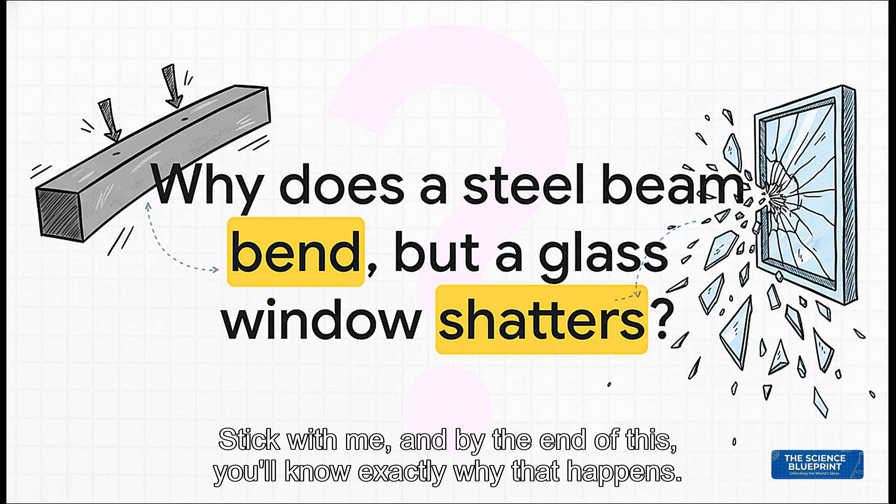Stick with me, and by the end of this, you'll know exactly why that happens. Okay, so to answer that big question, we kind of have to learn a new language. And just like any other language, we've got to start with the basics, a couple really fundamental words that explain the forces happening and how materials react to them.

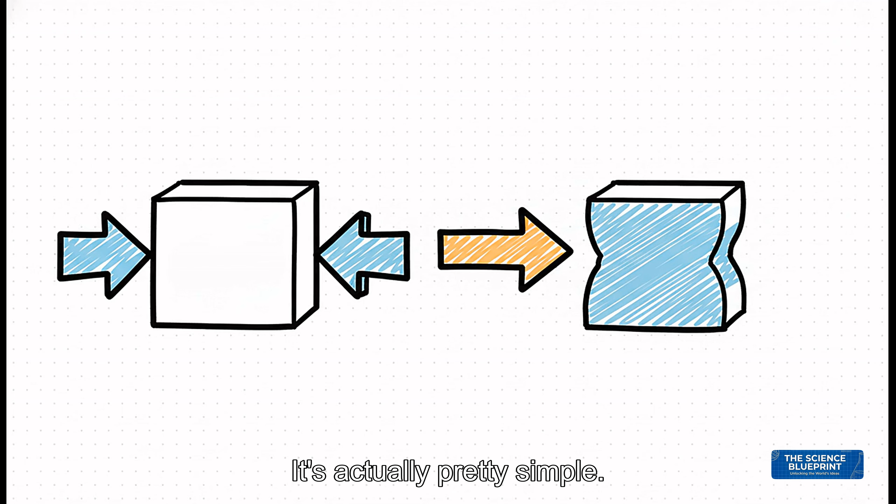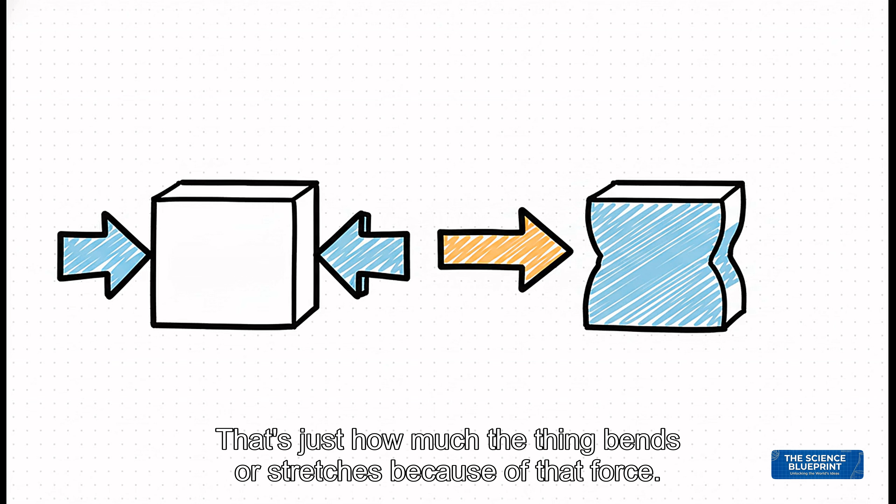The two most important words you need to know are stress and strain. It's actually pretty simple. Stress is the force you're putting on something, the push or the pull. And strain? That's just how much the thing bends or stretches because of that force. It's a basic cause and effect, and it is the key to everything else we're about to talk about.

So how can we actually see this relationship? Well, engineers have this amazing tool called the stress-strain curve. The best way to think about it is like a material's DNA. Seriously, it tells you the entire story of how that material is going to act when you put it under pressure, from the tiniest little push all the way to catastrophic failure.

Okay, so let's walk along this curve. At the very beginning, when we apply just a little bit of stress, the material deforms just a little bit. For a while, this relationship is a perfect, predictable, straight line. Engineers absolutely love this zone because it's where the math is easy and it just works. You double the stress, you get exactly double the strain. It's what allows them to make really precise and, more importantly, safe calculations.

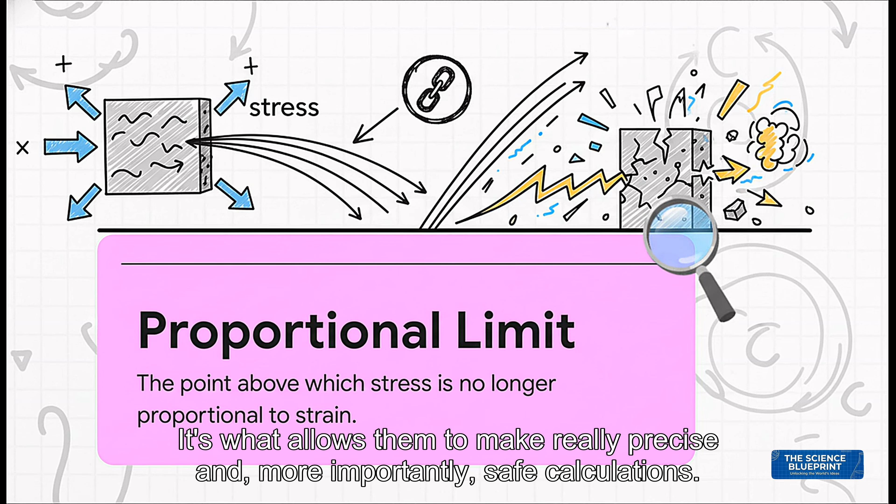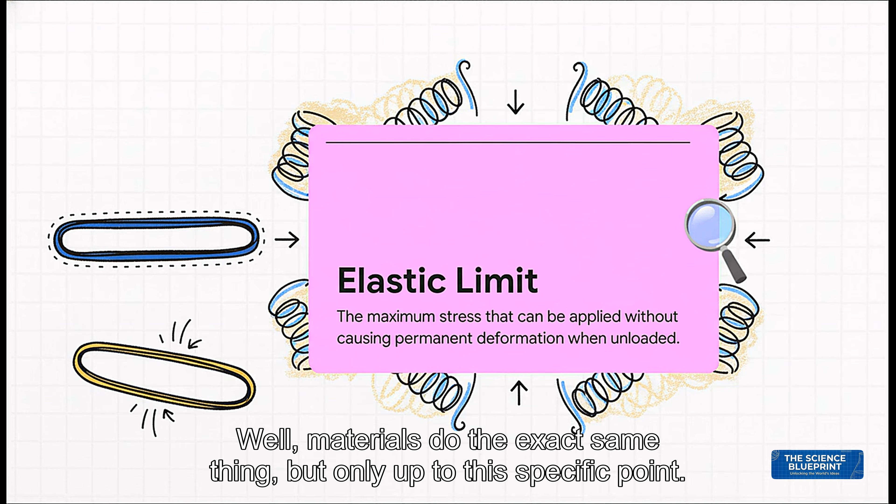Right after that straight line, we hit something called the elastic limit. I like to call this the rubber band point. You know how you can stretch a rubber band, let it go, and it snaps right back to its original shape? Well, materials do the exact same thing, but only up to this specific point. And this property is absolutely crucial for things like, say, a bridge that has to flex a little when cars drive over it, and then pop right back into place.

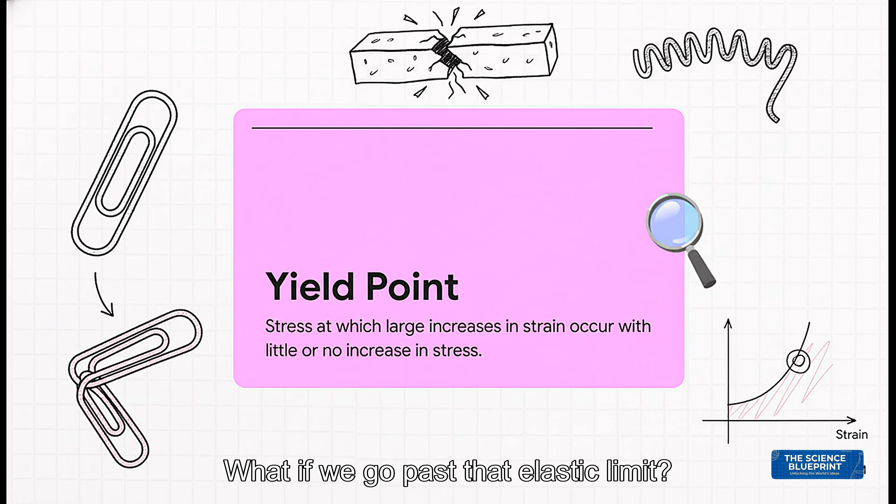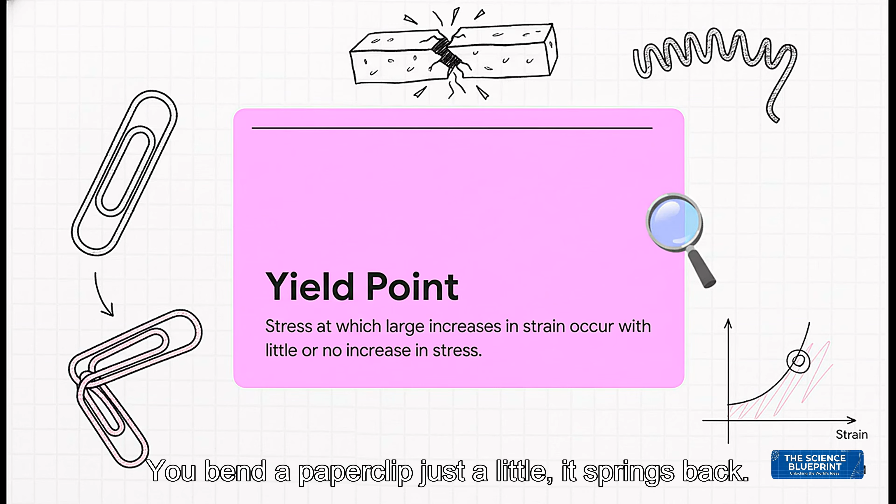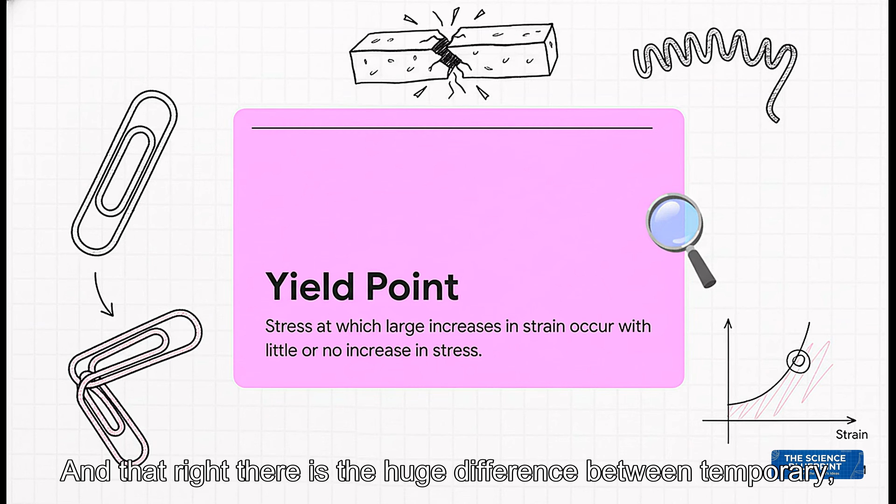But what happens if we keep pushing? What if we go past that elastic limit? That's when we hit the yield point, and this is the point of no return. Think of it as the bent paperclip point. You bend a paperclip just a little, it springs back. But you bend it too far, it stays bent forever. It has been permanently deformed. And that right there is the huge difference between temporary, elastic deformation and permanent, so-called plastic deformation.

So we keep pulling on it, and the material fights back. It resists more and more, until it hits its absolute maximum capacity. That peak right at the top of the curve, that's its ultimate strength. For an engineer, this number is everything. They design buildings and bridges so that the normal, everyday stresses are way, way below this point. They build in what's called a factor of safety to make sure disaster doesn't strike.

And after that peak, well, it's all downhill from there. The material just can't handle the stress anymore. It starts to weaken and weaken until finally it hits the breaking point. That's it, the end of the line. Complete fracture. The material just snaps.

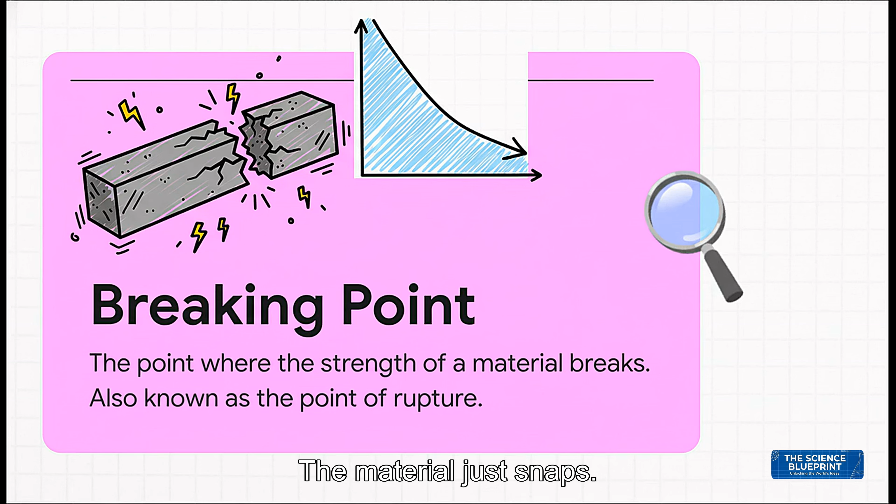So there you have it. That whole journey we just took along the stress-strain curve, it gives us the exact language we need to classify materials into two, let's call them personalities. And believe it or not, this is how we're going to finally answer that big question we started with.

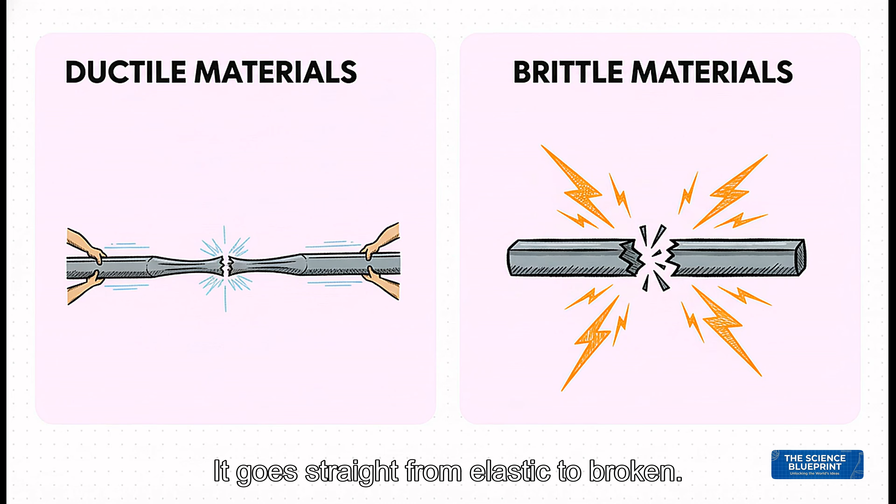And here it is, the big reveal. This is the answer. A ductile material, like our steel beam, has a really long journey from its yield point to its breaking point. See how it stretches and deforms? It gives you tons of warning that something's wrong. But a brittle material, like our glass window, it has almost zero plastic deformation. It goes straight from elastic to broken in an instant, no warning at all, just poof, a sudden snap.

But a material's built-in properties aren't the whole story, not by a long shot. To really understand them, we have to look at how they change over time, because the environment can attack them. And the most common, everyday example of this is corrosion, which you probably just call rust.

To put it simply, corrosion is really just a material trying to get back to its natural state. You see, most metals aren't just lying around in their pure form out in nature. They're found as ores, mixed up with other stuff like oxygen. So corrosion is basically just the metal trying to return to that more stable original form.

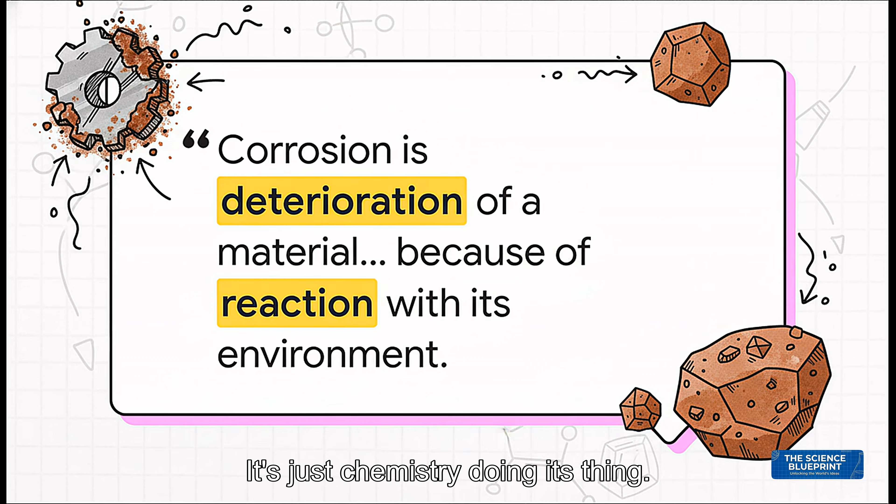It's just chemistry doing its thing. So what is the chemistry of rust? Well, it's basically a tiny electrochemical reaction happening right on the surface. In the simplest terms, when you have iron atoms and you expose them to both oxygen and water, they start to react. And that reaction creates a totally new substance, that flaky, reddish-brown stuff we all know as rust.

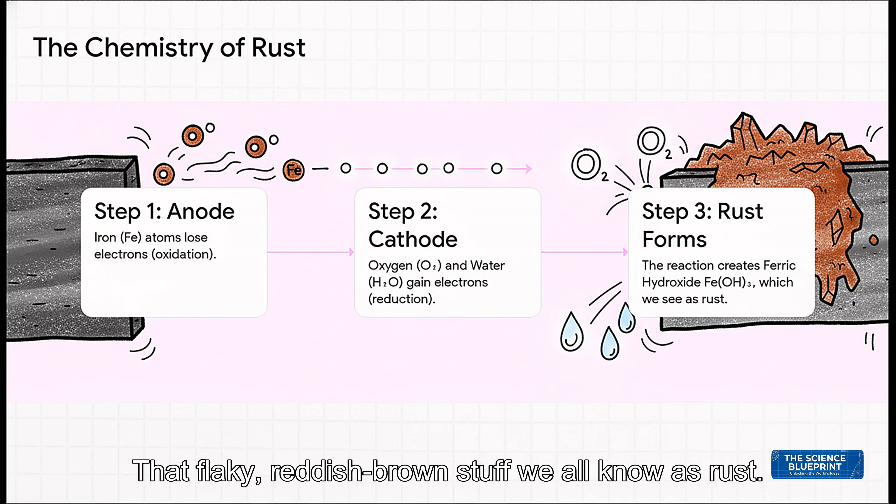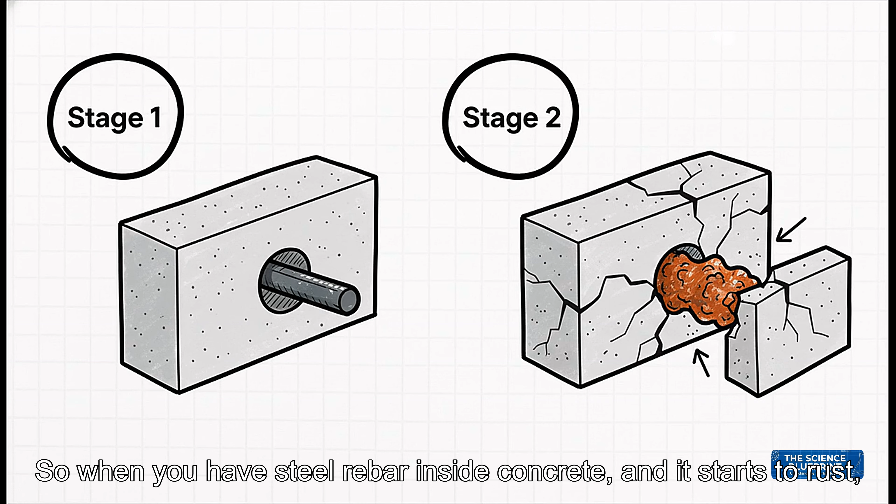Okay, so here's the really important part. Why is a little bit of rust so incredibly damaging? It's because rust actually takes up more space than the original iron did. So when you have steel rebar inside concrete and it starts to rust, that expanding volume creates this immense pressure and it literally pushes the concrete apart from the inside out. This is called spalling, and it's a huge cause of structural failure.

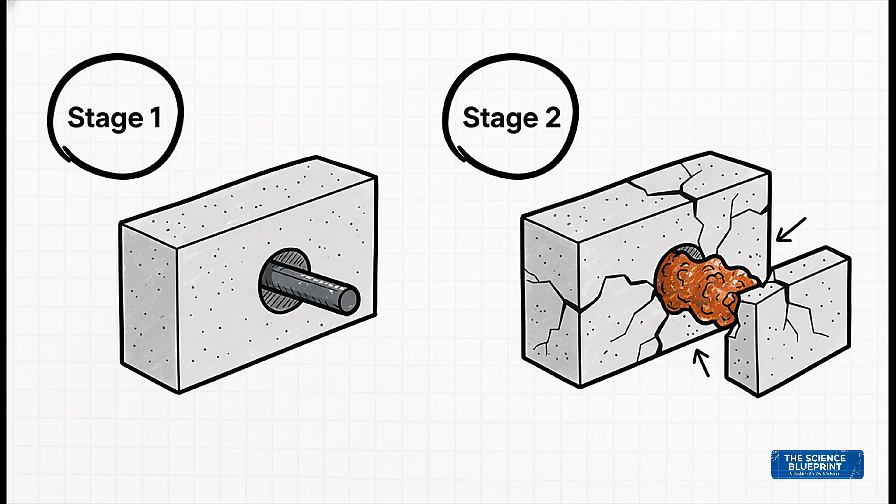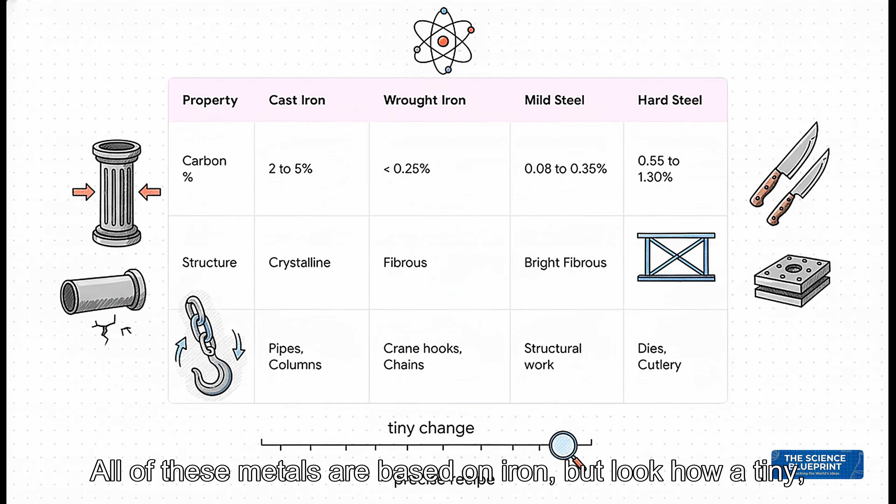All right, so now that we've got the science down, let's check out how engineers actually use all this knowledge to pick and choose and even combine different materials to build the world all around us. Just take a look at this. All of these metals are based on iron, but look how a tiny change in the amount of carbon completely changes their properties. A lot of carbon gives you cast iron.

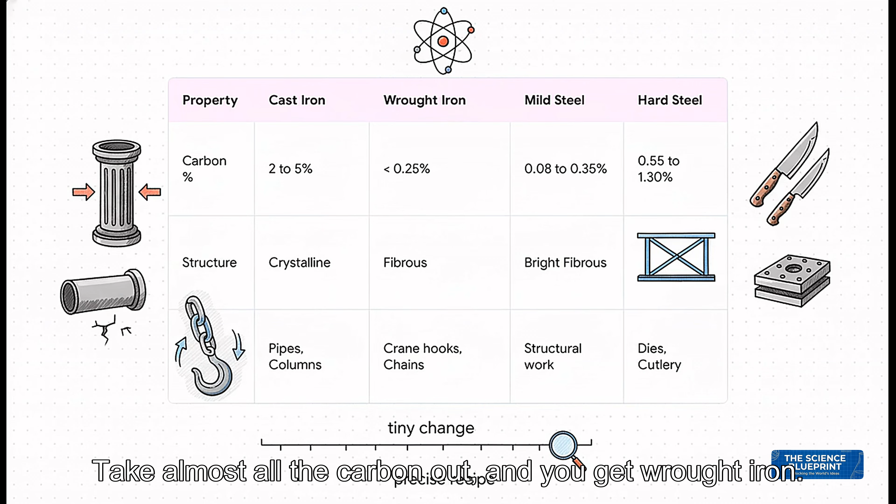It's hard and brittle, but amazing under compression, so it's perfect for things like pipes. Take almost all the carbon out, and you get wrought iron. It's tough and ductile, ideal for something like a crane hook that has to bend without snapping. It really is all about finding the perfect recipe for the job.

Then you've got plastics, which are a whole other universe of materials. I mean, their advantages are just huge. They're super lightweight, they're great insulators for both heat and electricity, and you can mold them into pretty much any shape you can dream up. Just think about their weight. That one property has totally revolutionized everything from cars and planes, making them way more fuel efficient, to simple packaging, which makes things a lot cheaper to ship.

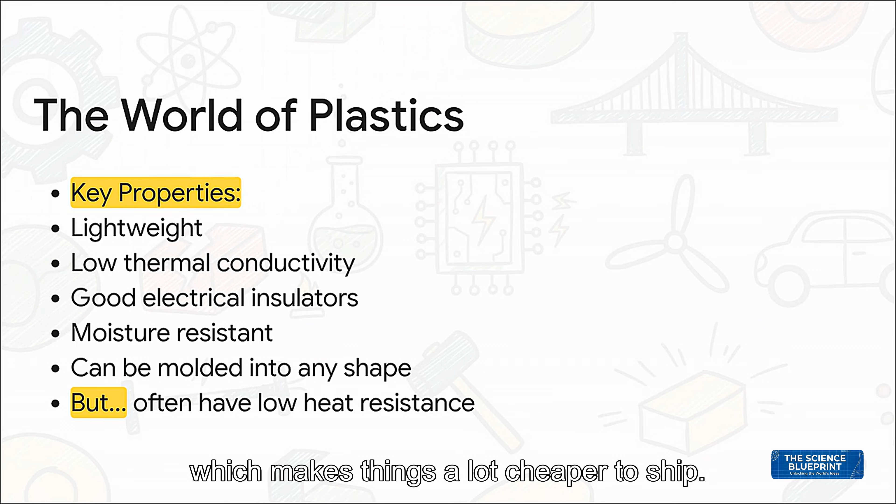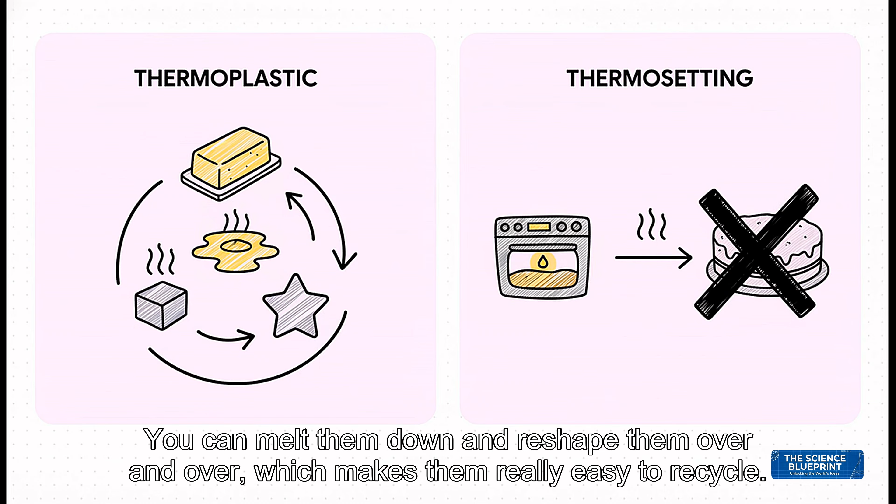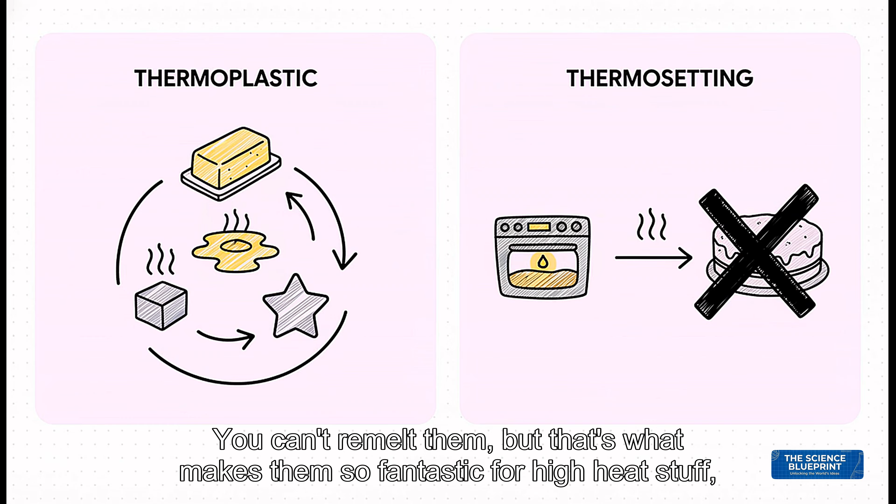And just like metals, plastics have their own personalities. You've got thermoplastics, which are kind of like butter. You can melt them down and reshape them over and over, which makes them really easy to recycle. Then you have thermosetting plastics. These are more like cake batter. Once you bake them, that's it. They're set permanently. You can't remelt them, but that's what makes them so fantastic for high heat stuff, like the casing on your electrical plugs.

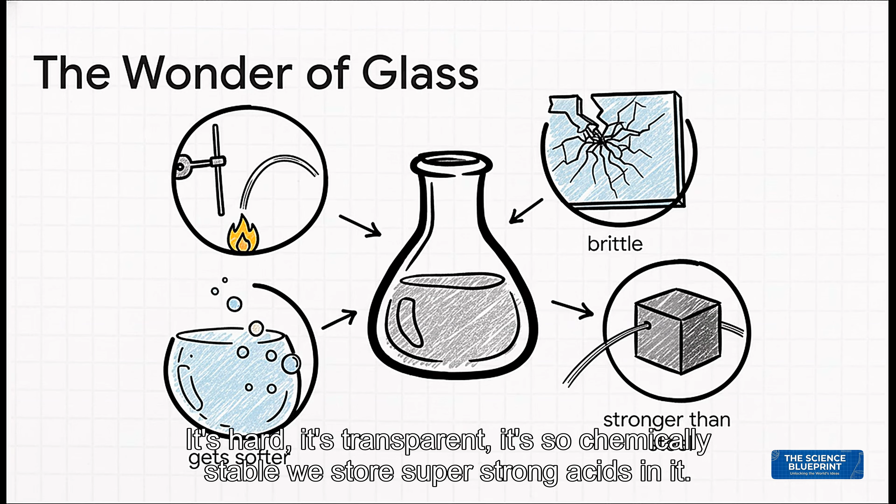And that brings us full circle right back to glass. What a weird material. It's a total bundle of contradictions. It's incredibly brittle when it's a window pane, right? But a super thin fiber of that same glass can be stronger than steel and carry all of our internet data across the entire ocean. It's hard, it's transparent, it's so chemically stable we store super strong acids in it. Just a truly unique and versatile material.

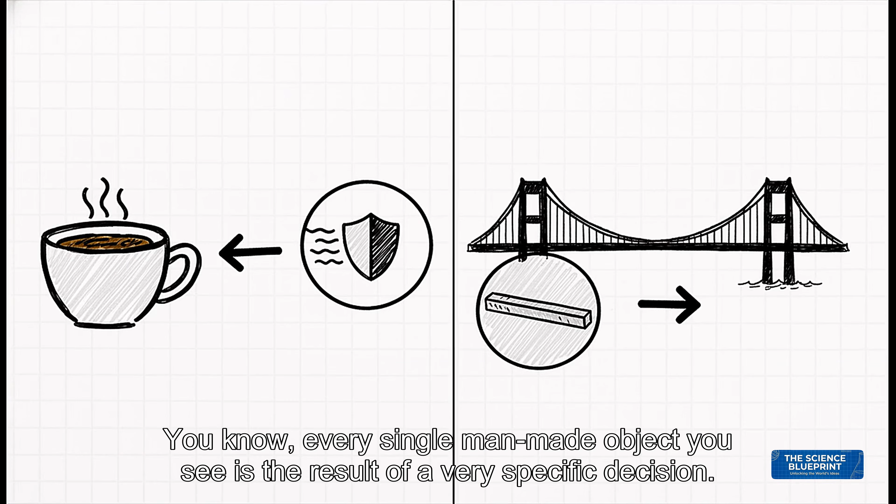So, with all these different options, how on earth do you pick the right one for the job? Well, that is the fundamental challenge, the big dilemma for every single designer and engineer out there. You know, every single man-made object you see is the result of a very specific decision. A coffee cup? It needs to handle heat without shattering. That's a job for ceramic. A huge bridge? It's got to be ductile, but also incredibly strong. That's steel. The story of our engineered world really is the story of these material choices.

And all this knowledge isn't just for building new things. It also helps us fix what's broken. Remember that spalling concrete we talked about? Here's how engineers actually repair it. First, they chip away all the loose, damaged stuff to get down to a solid base. After they clean it all up, they add a steel wire mesh.

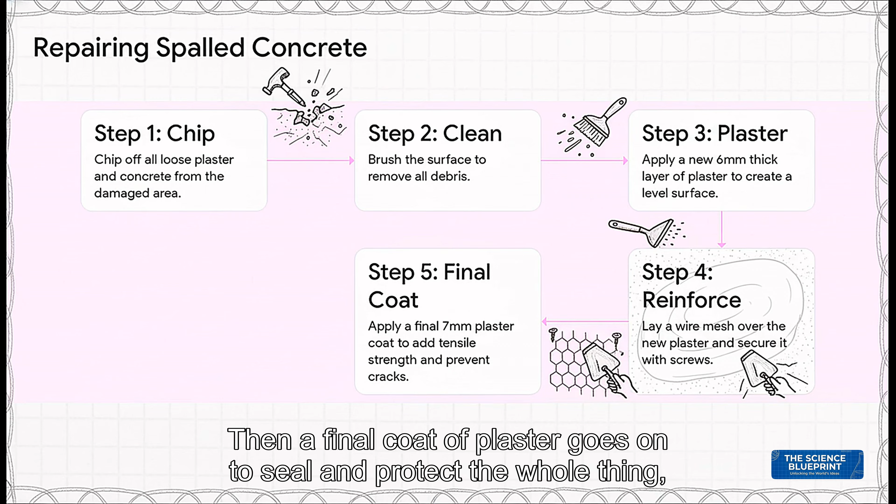Now, why do they do that? Well, concrete is great when you squeeze it, but it's terrible when you try to pull it apart. That wire mesh adds the tensile strength that the concrete is missing. Then, a final coat of plaster goes on to seal and protect the whole thing, making it even stronger than it was before.

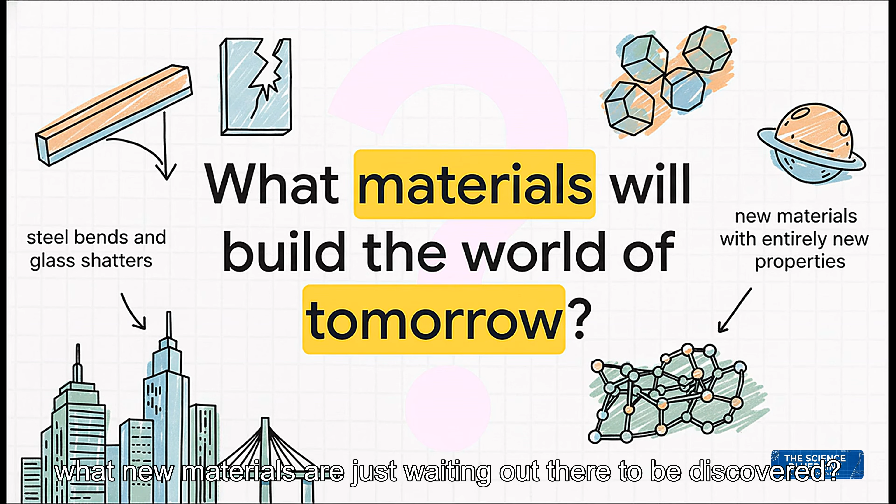So, we've gone on quite a journey here, haven't we? All the way from simple stress and strain to the complex choices that literally shape our world. Now you know exactly why steel bends and glass shatters. But as we keep pushing the boundaries of science, you have to wonder, what new materials are just waiting out there to be discovered? And maybe more importantly, what incredible things are we going to build with them?